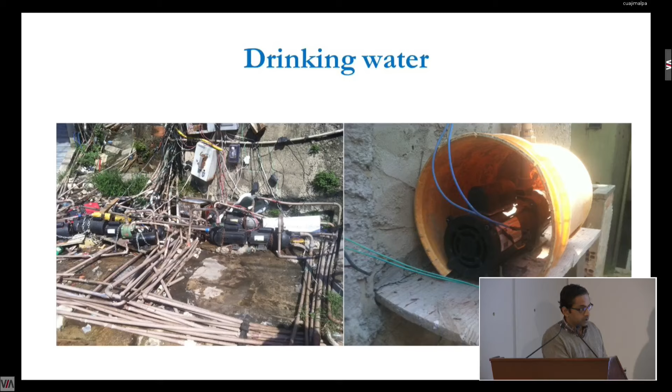On the other hand, from the same communities, you get drinking water all the way up top, but then essentially sewage comes directly out of these households. And you see this everywhere. This works very well because the drinking water and the wastewater are not connected, but the sewage comes right out. And again, this is a classical example of a linear model. Essentially, the model is as follows.

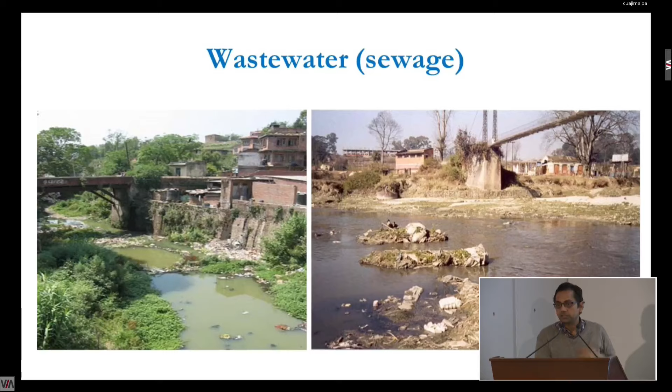We are mining water. In some parts of the world, we are blessed with tapping into surface water because everything is connected. Treatment is very good, so the surface water supplies are relatively clean, so you can still clean them, drink it, and then discharge, but that cycle is closed. But for most of the world, this is not possible. So somehow you get drinking water, but then out comes H2O plus X. So this is the linear model. It's not closed, it's not connected.

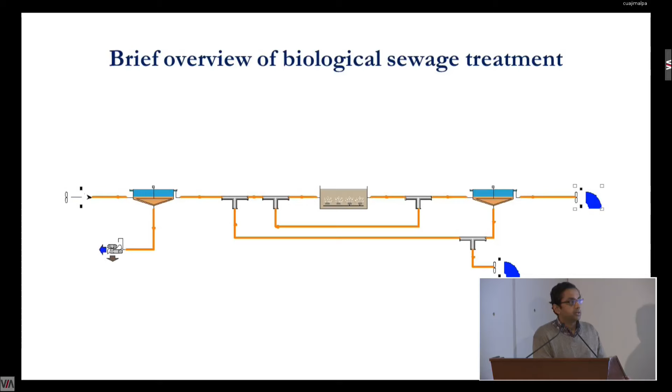What do we do now? So let's take a look at how things are done in some parts of the world. Let's start here because we have to start somewhere. When we talk about centralized biological wastewater treatment, sewage treatment, and again, this is very high level, essentially we take the high molecular weight, the high particle size stuff out, and most of this is done by gravity or mechanical means or adding chemicals and so on.

And then we get sludge, for lack of a better term, and it really makes little sense because this is really the richest feedstock, the richest substrate that can be biologically consumed. But what we actually feed to the biological reactors are soluble materials, some particulates, but more easily degradable materials.

So in wastewater, H2O plus X, the X can be considered mostly a mixture of organic carbon, nitrogen, and phosphorus, if you're talking about human waste. So we take all of that into these massive bioreactors, and we basically transform the organic carbon and, if needed based on regulations, the nitrogen and phosphorus. Now let's engage in some more discussion. It'll be good to understand what we are talking about in terms of carbon, nitrogen, phosphorus.

Okay, so let's start there, assuming that this is all human-derived waste: human-derived urine, human-derived fecal matter. Let's dig into this a little deeper. What is the oxidation state of organic carbon in human waste? This is good to understand because it impacts what we are actually doing with it, or what we should be doing with it. What is the average oxidation state of organic carbon in human waste?

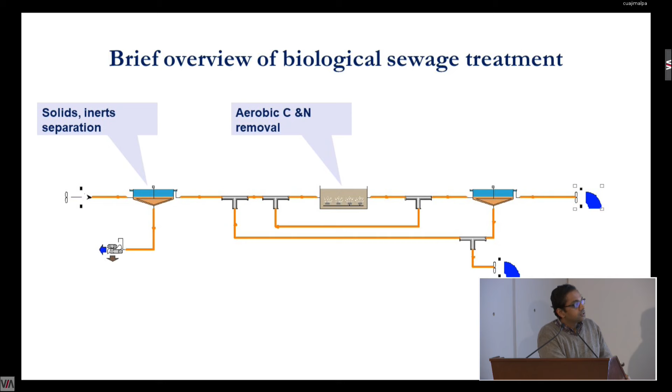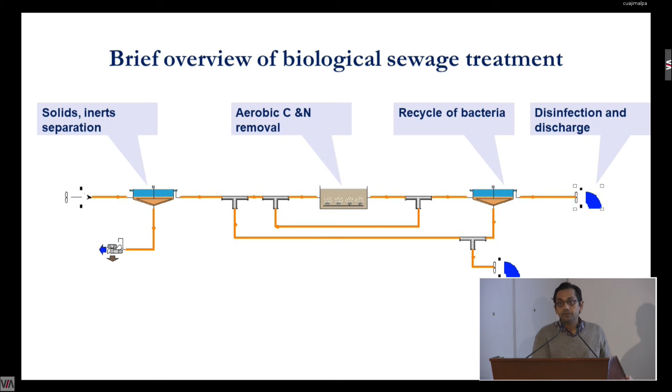Phosphorus we can precipitate out and do other stuff. So all of this has happened. Then we produce more bacteria here. We settle the bacteria, put it back into the reactors. Depending where we are in the world, we can disinfect it and discharge it. What have we obtained in return? We obtain clean water.

Now, all of this comes at a pretty significant cost. The energy that we have to provide to oxidize the carbon, to oxidize the nitrogen is quite substantial. We also need to invest a lot in terms of chemicals to drive some of these processes. And then in some cases, the organisms and the reactors that we're dealing with can also produce greenhouse gases, which could be quite substantial.

Okay, let's put some actual numbers. If we are talking about very good treatment processes, but which are inefficient in terms of energy and chemicals, we are talking 60 cents to $1 per pound of nitrogen removed. Even if we say 50 to 60 cents per pound of nitrogen removed, this is quite substantial.

In terms of chemicals, at least close to where I am right now, we spend about $20 to $40 million just purchasing organic chemicals to remove nitrogen from the wastewater in New York City, and that's quite substantial as well. And what have we obtained? We have obtained clean water.

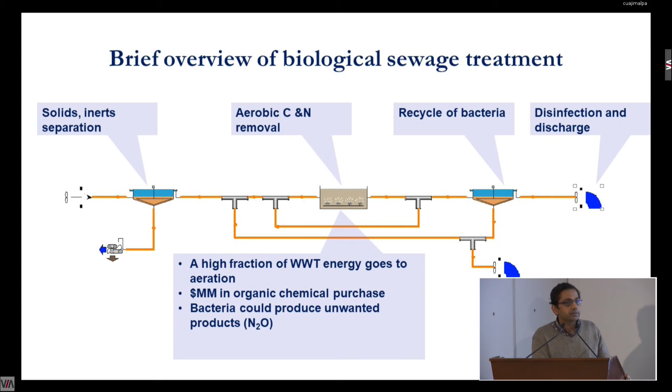Going back to the grand challenges, we have solved the challenge of water, but just the challenge of water. We have no accounting of how much we are spending. We don't pay much attention to how much we are spending in terms of energy, in terms of chemicals, and so on. And that's fine, it works, but what really goes wrong is when we take these models and put them in parts of the world where they are never meant to be. So let me show you another example.

So this plant is supposed to be fed with trucks that come in with fecal sludge from the greater Accra metropolis. Accra doesn't have pipes. They don't have pipes for drinking water. They don't have pipes to convey the fecal sludge into these plants. So the trucks come in, they empty the tanks, and they take them to plants like this. Accra, like many cities in the world, is also subject to variability in terms of traffic. The truck drivers are paid based on the number of trips, not delivered to the plant, but emptied out of the households. Okay?

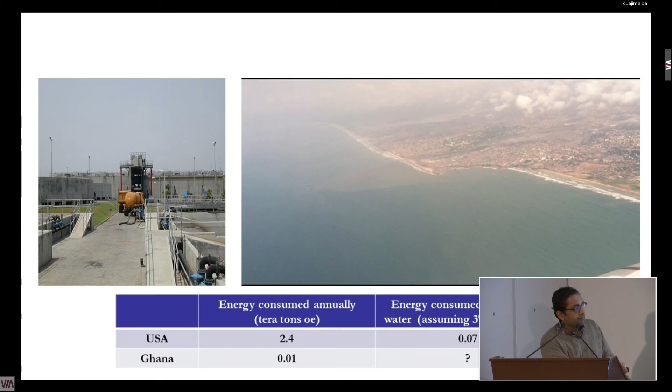So first I have the United States, and here I have the energy consumed annually in the US. And the value here is 2.4 teratons of oil equivalents. Okay, it's a large number. 330 million people, this is the amount of energy that's consumed. A fraction of that is devoted to the enterprise of clean water, drinking water, wastewater, pumping, treatment, everything. So it's 3 to 6%. Even if I take a low number of 3%, I have the number of 0.07 teratons of oil equivalents devoted to the enterprise of clean water.

Let's go to Ghana. This is where we are. Let's go to Ghana, and even if you normalize, the population there is about 30 million people. They don't even have the energy that we can expect them to take, especially all these technologies from other parts of the world, and expecting to put them here and run those technologies. They just don't have the energy.

And just to give you an example from a very personal standpoint, I grew up in Delhi in India. We did not have energy 24/7. I remember sitting writing exams when the temperature was close to zero, and what happens is your handwriting becomes smaller and smaller because it's cold, your hands are freezing. And then you get 40 degrees Celsius in the summer, and then there's no electricity.

We did not have access to clean water 24/7. We had access to water 3 hours a day. So we also had illegal pumps, and we boosted the water and stored massive amounts of water. But this is reality, and it's not just clean water and sanitation. This is reality for about 4 billion people on the planet.

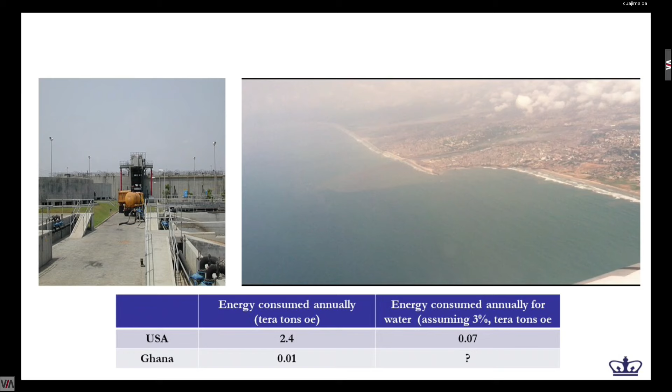And so now if you ask those people to take the little energy that they get and devote it to models like this, they are absolutely not going to do this, right? So we need better models. We need to totally change our thinking. And so the model that we have now, let me go back one slide. This model that we have now, we take H2O plus X, and we put in more energy, more chemicals, more resources, and what we get back is H2O to meet a certain set of permits or regulations, and we've devoted some resources here, and that's not possible.

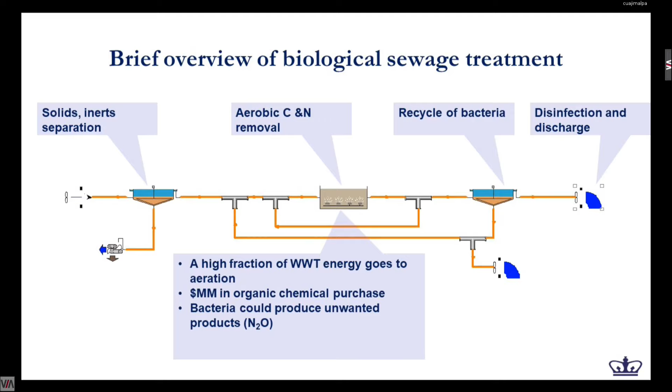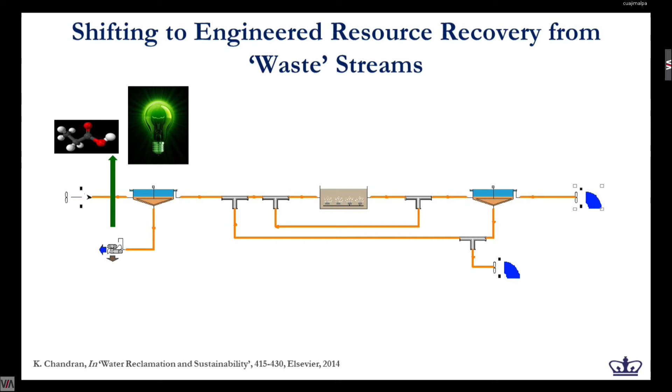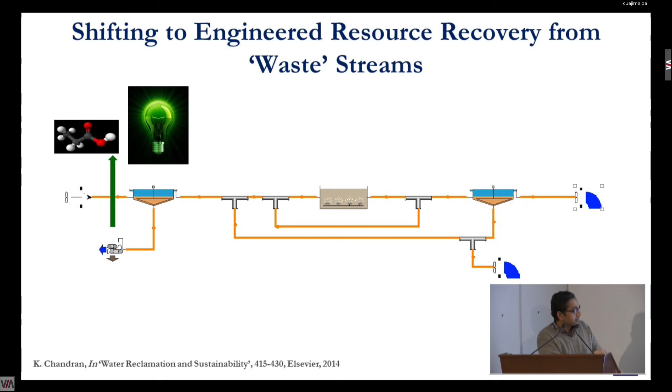So what do we do? Let's go back to the blueprint. Instead of putting in more, perhaps we can consider recovering the X, not removing the X, but recovering the X in the form of chemicals and energy. And chemicals, I think we really have to pay attention. It's not just energy. In some parts of the world, energy is not the appropriate endpoint. It's chemicals. It's other products. We can recover this here instead of dumping the sludge. We can do this, of course, in the bioreactors. These are the factories where we can recover a lot of this.

Let's look at the flow. And as I understand it, there are plants in Mexico City, single plants from which there is a huge flow of wastewater. And after treatment, we can recover some of that energy as well. We can recover chemicals and energy here. And the point here is, what am I missing here? I'm missing clean water, because if you do this properly, you can produce clean water not as the sole product, but as the byproduct of all of this.

So now we are not talking about wastewater treatment anymore. We are talking about biorefineries that take not just sewage, they take all sorts of other waste, agricultural waste, industrial waste, and so on. And so these are basically refining not just carbon, but nitrogen and phosphorus up to different endpoints, of which water is one of the many products, not the sole product.

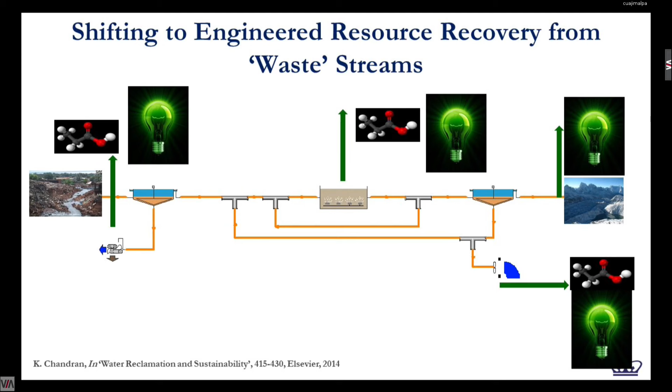And this is a model that can be perhaps adopted. And just to give an example also, in terms of what we are dealing with, just for the city of New York, we are treating close to 1.2 billion gallons of sewage per day. And what does the sewage contain? It contains about 2,000 tons of organic carbon per day that can be recovered, not removed, not converted to CO2.

It also contains about 300 tons of nitrogen in exactly the same oxidation state that we needed for plant growth. It also has about 60 tons of phosphorus. So instead of taking all of this and removing this, perhaps we can start to recover some of this. This 300 tons of nitrogen per day, if you multiply it by $0.5 per pound of nitrogen removed, you can try to figure out the cost.

And this is also why we need more efficient technologies that can use less energy, use less operating capital for operations as well. And then I would urge you perhaps to do the same kind of calculation for Mexico City or other cities to figure out what should be done, what can be done, and how it should be done.

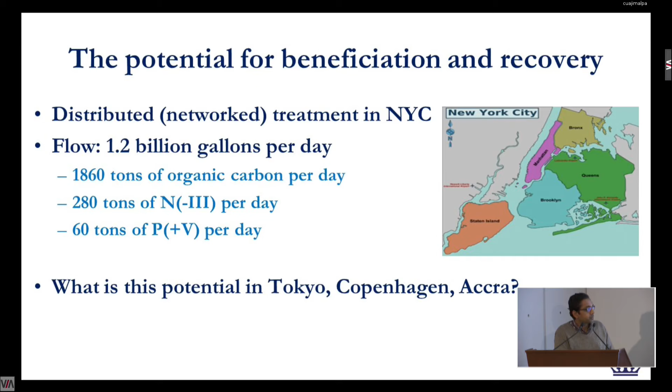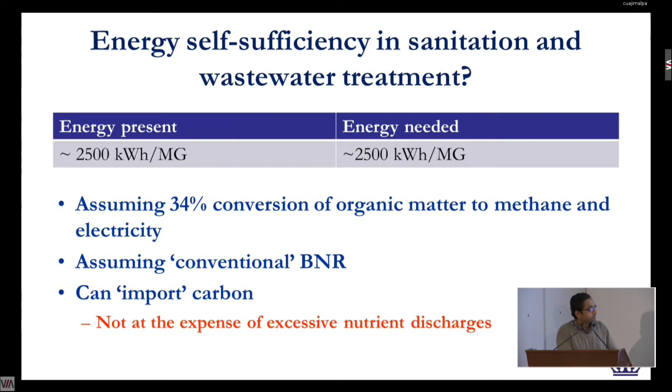If we now stop thinking about wastewater treatment, pollutant removal, if we now start to look at recovery of resources, including water, it doesn't have to be potable water, including water for different objectives, this now becomes more and more favorable. So let's take a few examples now, and that's what I'm going to spend perhaps the rest of the time today.

And so what can we do in terms of end products? We really have to stop thinking about biogas. We really have to start thinking about other endpoints beyond biogas just for the carbon. The nitrogen and phosphorus we can think as well. And I know many groups here are actually working on this. Professor Reva himself is working on this, going beyond biogas to far higher value chemicals.

Of course, we have to figure out the market. We have to figure out the economics. But we really have to stop just fixating on biogas. What can we do? We can look at high energy, next-gen biofuels. We can look at commercial chemicals. Nutrients, of course, can be recovered for fertilizer as well.

The other thing that I always stress is that we should really, again, stop getting carried away. Just because we can make biofuels, just because we can make high-value chemicals doesn't mean we should. We are not in this enterprise just to extract chemicals that have no end application. This resource recovery really needs to address a higher objective.

And in some of the work I have done, the objective is just providing sanitation. Okay, that's the higher objective, which is then supported by some of the resources that we are able to recover, and that I will discuss as the first example.

So the first example I want to give is the work again back in Ghana, where the objective was to convert the organic carbon present in human fecal sludge to lipids and to biodiesel. And the point was not to make biodiesel just to sell at a pump. No, the point was to run the treatment plant processing the fecal sludge on the biodiesel that we were recovering.

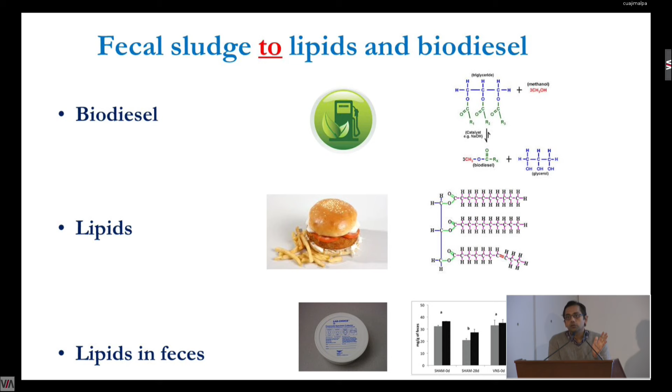Okay. So initially the objective of this project was not fecal sludge to lipids. It was basically fecal sludge to biodiesel. And they even came up with a nice acronym, and then we realized it's not the most efficient. I'll come back to lipids and fecal matter later on because I have this nice picture I can show you.

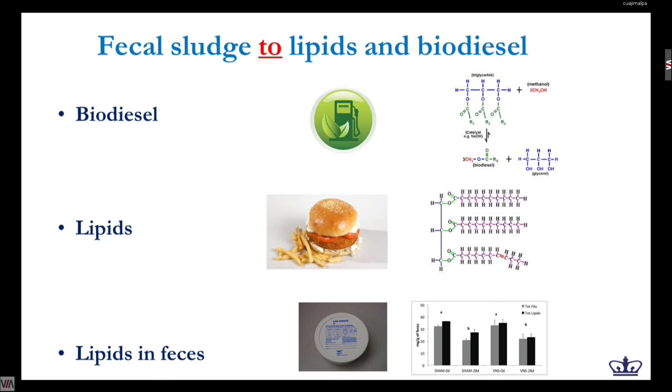But the point is, when we go do a lipid panel, I'm going back one slide, the lipids present in human fecal matter is very, very low. It's about 6 to 10% on a dry weight basis. So 6 to 10% of this is this lipid fraction. So if I want to do this, react with methanol and make biodiesel, I'm going to get a very, very small amount of biodiesel.

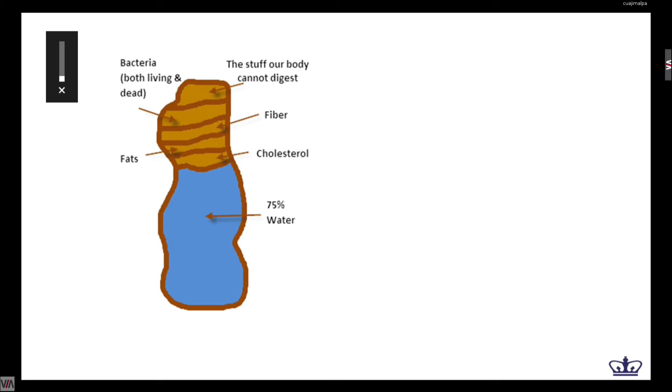Of course, we realized that this is the limitation. We didn't stop. What we then figured is, if we can take all of this and convert all of this to lipids, then we have a higher mass of lipids that we can actually work with. We can produce a lot more biodiesel, and perhaps this becomes more favorable. So our technology basically doesn't focus on the intrinsic lipid fraction. We basically take everything and convert it to lipids.

Then the question is, why do we stop there? We can take everything and convert it into carbohydrates. Take everything, convert it into other organic molecules, right? So now this is biorefining. It's not just scavenging the lipids and making biodiesel. This is now truly refining, taking a mixture and making basically anything that we want with it. This is more powerful, and that's what we did.

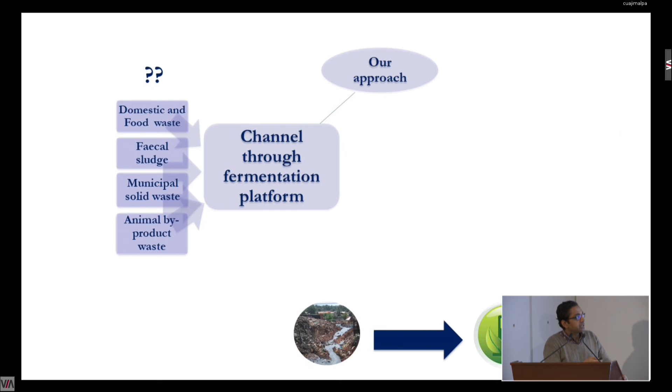Okay, so basically the platform technology that we have is, we take basically any waste, these are all enriched streams, we channel this through an anaerobic fermentation platform to make short chain volatile fatty acids, and then we use those volatile fatty acids to go anywhere. So we've done lipids, we've done some other compounds as well.

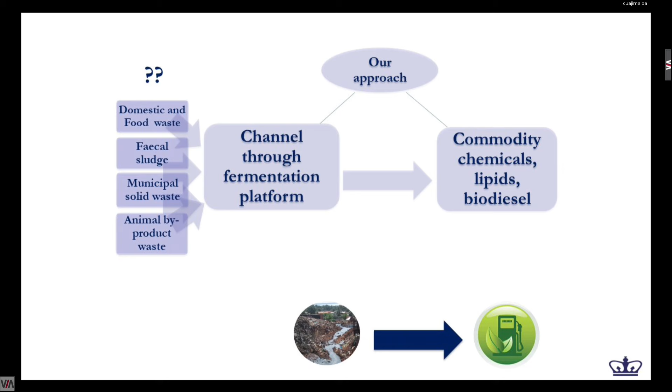And so the point is, the challenge I think today is to basically understand what we can make with the VFA. That's really how powerful this technique is. Once we make the VFA, we can, I think, go to many different endpoints. So let's now understand what we need to do in terms of producing the VFA. So for that, again, let's go back to this conventional model of anaerobic digestion.

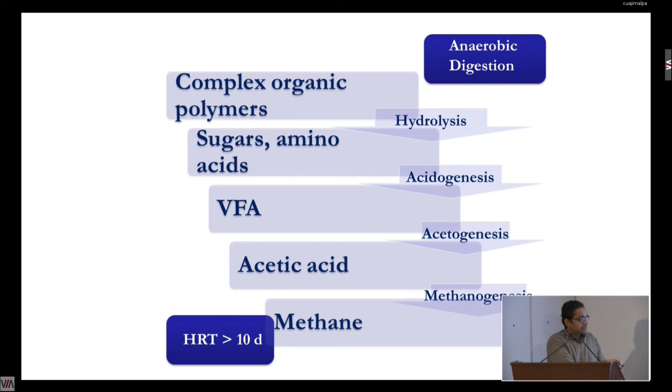So anaerobic digestion, as we treat it, is essentially a cascade of multiple processes. The first 3 steps are catalyzed by bacteria. The last step is catalyzed by archaea, and traditionally, for most engineered configurations, the last step is the rate limiting step. It's the slowest step.

So if you want to accommodate the slowest step, you have to provide a long retention time, right? And so the retention time typically employed even at mesophilic temperatures is close to 10 days. So essentially we need a long hydraulic residence time or a solids residence time, and this is what we need if we want to produce biogas.

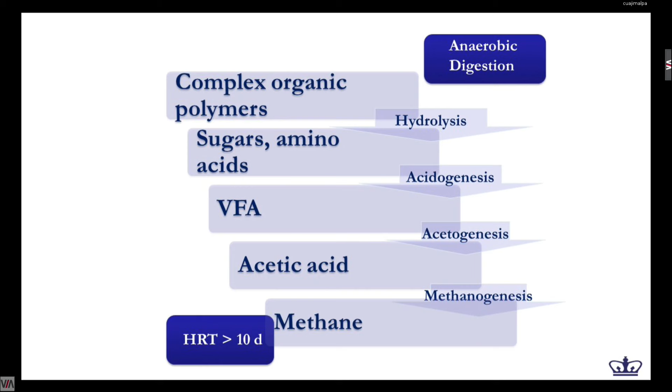Now there are also other endpoints that I'm going to focus on, and that's not biogas. They are the precursors to biogas, the short chain volatile fatty acids, for instance, acetic acid, propionic acid, butyric acid, and so on. So what do we need to change if we don't want biogas, but we want some of these intermediates? So that's when we talk about anaerobic fermentation, not digestion, but fermentation.

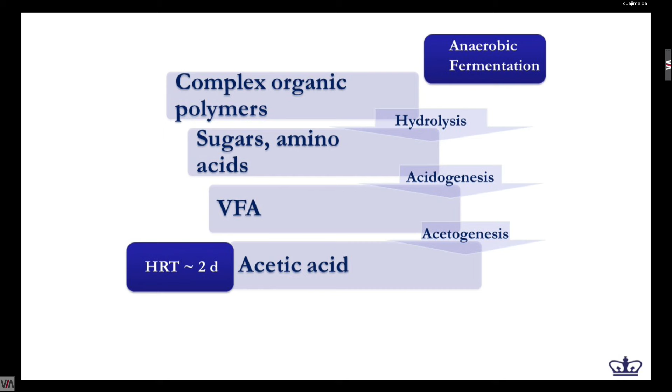And so basically, if you want to take out the last step, which is the slowest step, you can design a process with a much lower retention time, a smaller reactor. So by doing that and a few other controls, you take out the biogas. Now biogas, again, just to emphasize this, is not all methane. It's a fraction which is methane. It's got CO2, it's got other gases, it's got moisture as well. So it's not trivial to use biogas if you want to recover high value energy. But we know how to make biogas, and perhaps that's why we do it.

But there's a lot more potential if we don't go all the way to CH4. Let's say we don't allow it to go to CH4, we just basically take the acids, and we can do a lot with the acids. And the other advantage is we have smaller reactors, or for the same reactor volume, we have a higher throughput.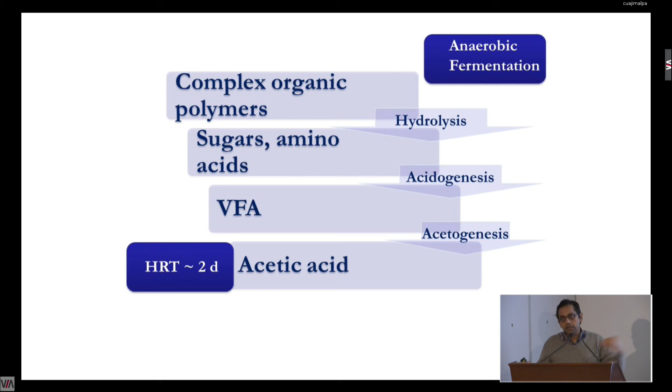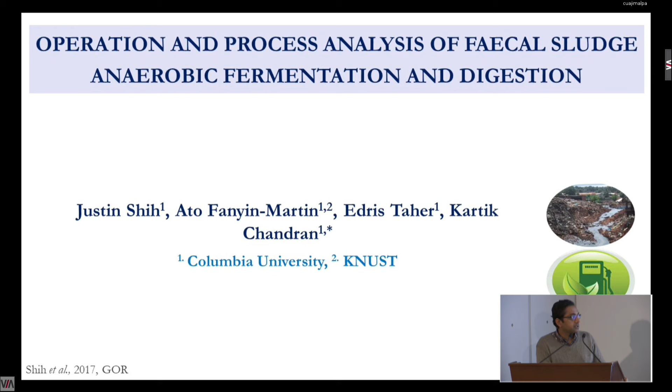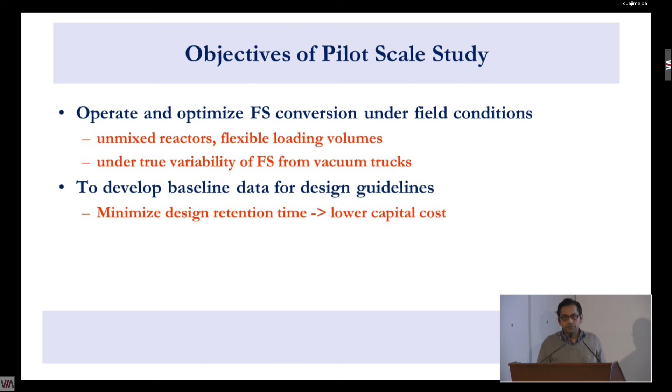Okay, so now let me take you to the results. So for this project, the focus is extracting the acids, making lipids, and then making biodiesel with the lipids. And this was done in the city of Kumasi. We were working with the Kwame Nkrumah University of Science and Technology, which is in Kumasi. So this is Ghana. This was our system. And so the objective was to basically convert the fecal sludge into biodiesel. I'll skip through this. And this is the system that I designed. So let me show you some pictures.

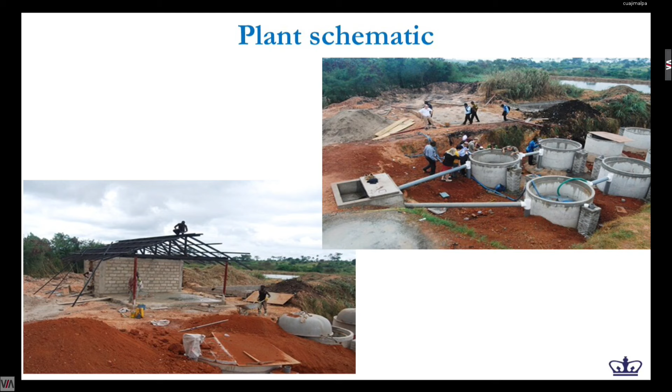So this is where we are. Here you can see, this is basically a dump site for fecal sludge. It's far away from the actual city. There's no water, there's no electricity, there's no Wi-Fi, there's nothing. But there's a very, very steady supply. Every 2 to 5 minutes there's a truck of fecal sludge coming in. That's guaranteed. There's nothing else, but there's a lot of fecal sludge. It's a dump site. And so here you have anaerobic lagoons. Here you have also mountains of fecal sludge. So we are surrounded by fecal sludge.

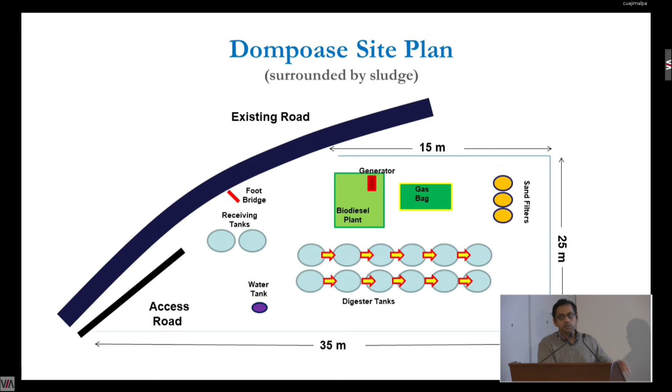And so we actually built this whole system from scratch. And so these are the tanks. Each tank is actually 10 cubic meters, and there are 12 of these tanks. Okay? So essentially we are taking fecal sludge that comes in, we have the receiving tanks, and we have a splitter box. And the hypothesis here was, I basically staged these reactors, and each tank is about 2-day HRT. So the fast reactions can happen here in the first upstream tanks, and the fast reactions are the ones producing the acids, and then the latter tanks can produce the biogas, the methane, right? So that was the hypothesis.

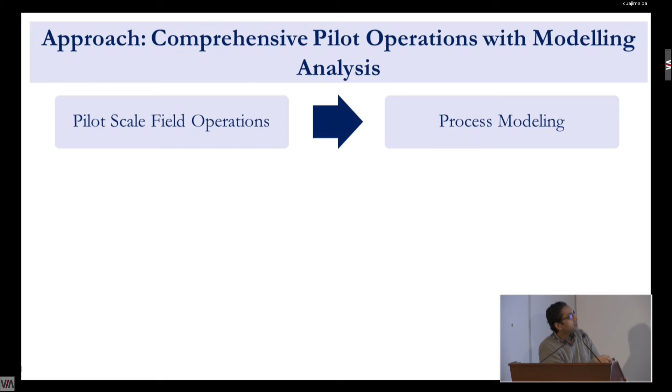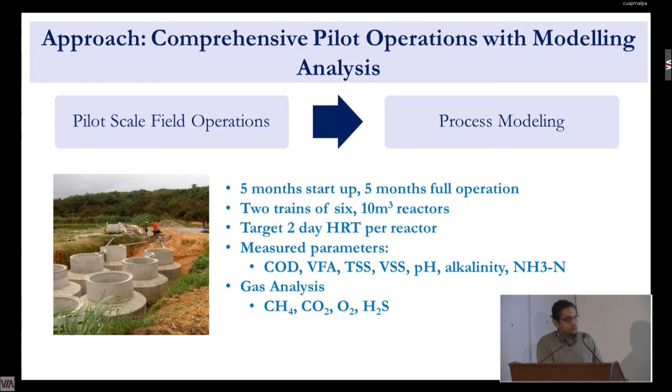Okay, so we had all of this, we ran the reactor, and this is our approach. We ran the reactor for close to 10 months or so. We took the data and we did some process modeling, model calibration, and then we have a model now that we can use, and these are the details and so on. And we did a lot of measurements from multiple reactors over time. We did a lot of measurements that are not typically done in the wastewater industry, not with fecal sludge. Nobody does this for fecal sludge. But the point is, we are not running a fecal sludge treatment unit. We are running something where we want to produce biodiesel. So we obviously have to start measuring a lot more.

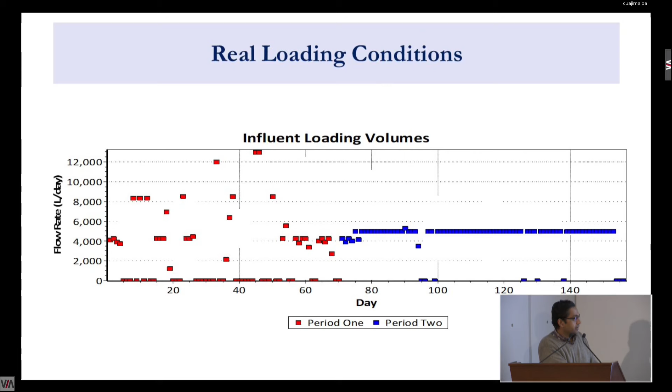After that we were able to balance this a lot better, and our process also started doing this. Just to give you an idea of what fecal sludge actually is, just in terms of the coarse parameters, this is the variability that we are looking at. Huge variability. We can't stop because we have variability. We have to just design our process that can handle the variability.

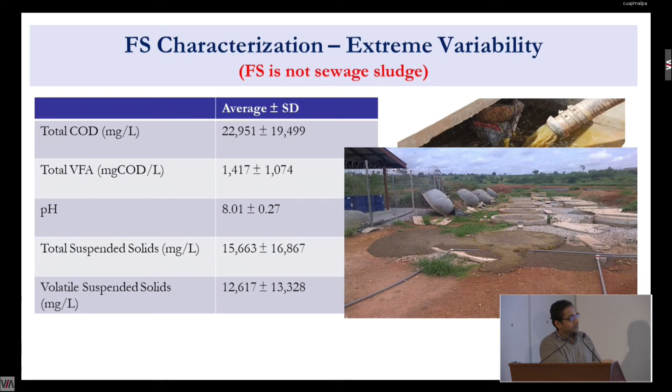That's the point. Okay. Sometimes what happens because of the variability, this is tank number 1, 2, 3, 4, 5, 6. There is so much production that the tank overflows. So this is a mixture of processed and unprocessed fecal sludge, but that's reality.

And so using all the numbers we had, we actually calibrated the process model. The process model is basically a set of equations that describe the multiple steps of carbon conversion. So there are probably thousands of parameters in this process model. And I'm just showing you a very tiny sample data set. So this is reactor 1, 2, 4, and 6.

And then here I'm showing you the dots, which are the experimentally measured values of the total VFA, off-gas flow rate, and then the red lines are the process modeling outputs. The calibration approach is basically to match up as well as possible the model and the experimental results.

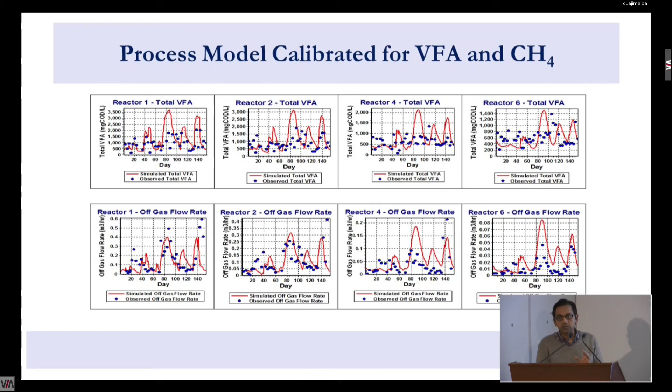And so if you want a perfect match, you can go and change all the parameters, put it into a data mining software, change all the parameters, and you'll get a perfect match. But this will be meaningless. A good calibration exercise, if you truly understand the process, changes as few parameter values as possible, and still gets a reasonable match. And so for our calibration effort, with all those thousands of parameters, we only changed 7 parameters, basically, and we were still able to get a good match.

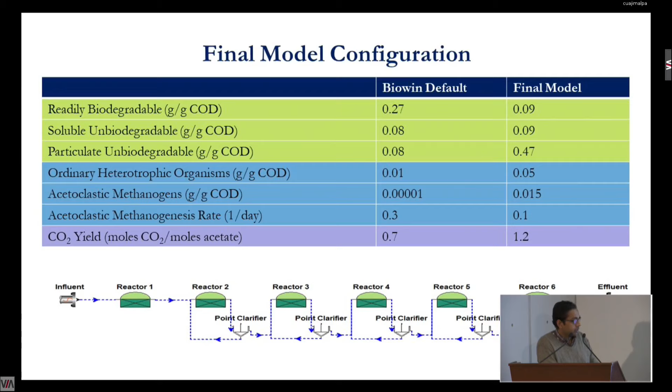And the point is, now we have this process model that allows us to describe the fate of fecal sludge through this cascade of reactors to produce both biogas and volatile fatty acids. And I'll tell you right now that the hypothesis that the upstream reactors will produce the acids and the downstream reactors will produce biogas was not valid, because fecal sludge is not inert.

It comes in already with bacteria, it comes in probably already with archaea, and they are active. It's already getting processed when it comes in. So even at a 2-day retention time, we get biogas production, because this is not dead material. It's actually active. And all of this had to be considered during our modeling approach.

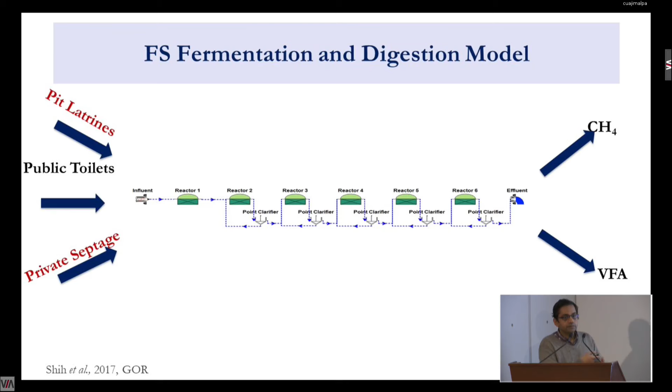But the point here is, this was the first model for fecal sludge conversion, not just to biogas, but in a very systematic fashion, conversion to VFA and methane. Now we can extend it if you're now talking about pit latrines and other processes, other interventions. Okay, so that was one of the results, and the project was quite remarkable, because we were told not to do any lab scale work.

We were told basically to go out to the field, and at a scale that was actually reasonable. So that system, the 120,000 liter system that I designed, was for close to 20,000 people. Okay, if you imagine building a plant for 20,000 people using the conventional centralized model, the plant would have been orders of magnitude larger in capacity. And that's because of that dilution factor.

And that's the point. Now, what are the outstanding research gaps? Of course, we have this. This is great, but we don't stop there. What else can we learn? What else do we need to do? I showed you the cascade of anaerobic carbon conversion.

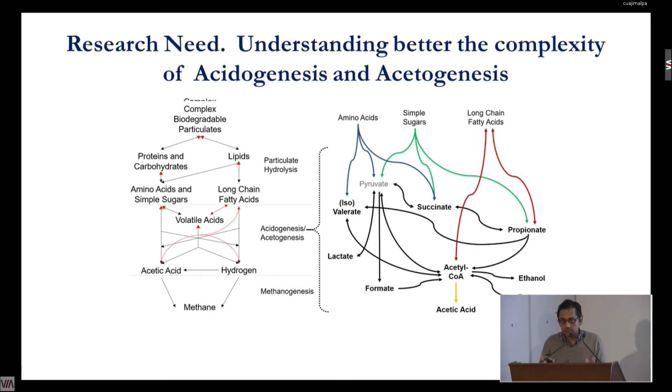But the point is, we don't even understand how to convert the organic carbon to volatile fatty acids completely. We have a pretty good understanding, but it's not complete. And so that's something that we are working on right now, because this is where we want to stop. We want to produce volatile fatty acids, but we want to do so in a controlled fashion. We want to be able to produce a defined amount of acetic acid, propionic acid, butyric acid.

We want to maximize the conversion. We want to maximize the yields. And we don't want to sit there and measure 20,000 different components in the feedstock. What we want to do is, if I am given the fraction of amino acids, the fraction of carbohydrates, the fraction of lipids in my incoming organic feedstock, I need to be able to predict what I can do in terms of my effluent VFA speciation and the yield. This is what I need to do.

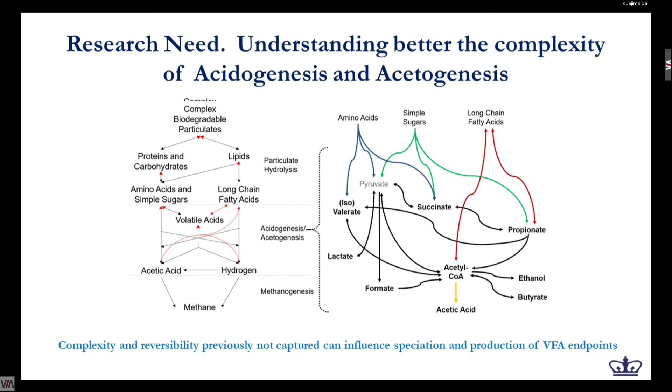So this is real bioprocess engineering, and this is the black box that we are now trying to open up. And so in this project, we went kind of in the reverse fashion. We went to the field and came back into the lab and ran some reactors. So we cannot use fecal sludge in some of the labs at Columbia, so we use food waste. And we fed reactors with food waste. These are continuous reactors again, long-term reactors, run over a year or so. And we did 6 reactors. So these are the 6 reactors.

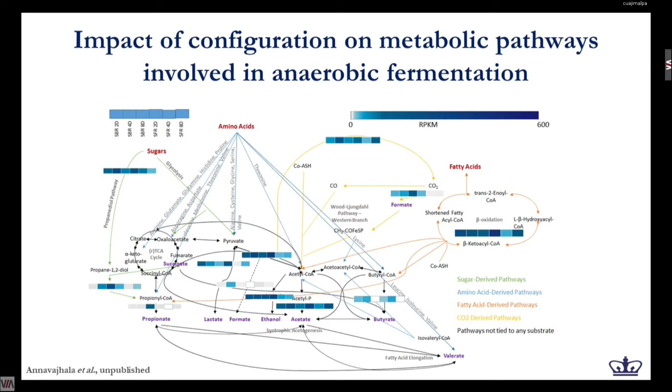We don't have to do this for every system we run. This would be impractical. But once we understand the system, then we can connect the arrows, feedstock to product. Ultimately, that's what we want to run. We don't want to run black boxes. We want to run real engineered reactors. Okay, so let's keep going. So we know how to make VFA. Let's say we make VFA. What do we do?

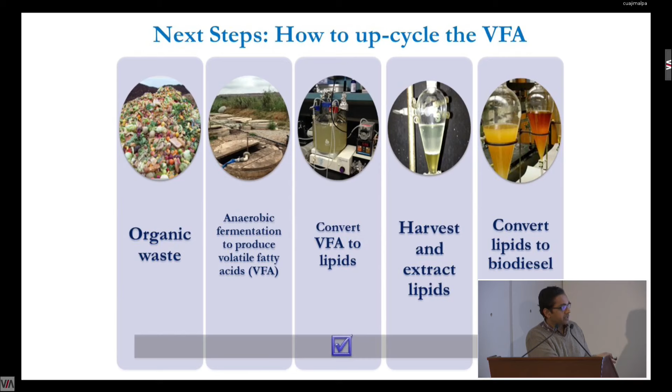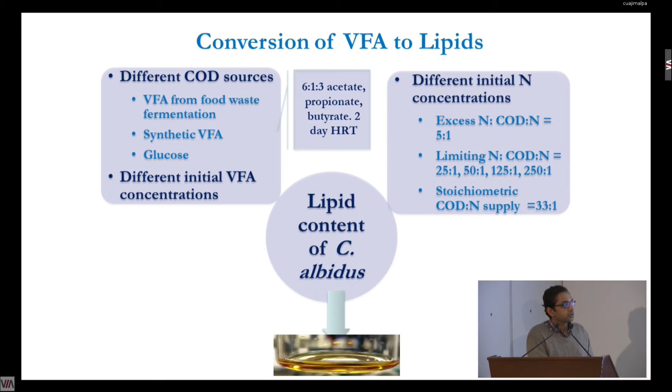After we concluded our project for biodiesel, we realized that maybe we should not be making biodiesel, maybe we should make lipids instead. So now I'm going to share with you very quickly how we make lipids. So basically we make VFA, and how do we go to lipids? We basically use a yeast platform to convert the VFA into lipids. There are some advantages to doing this. I won't focus on that now. Maybe I can do that during Q&A. I'm going to run through this, skip this. But essentially, it's good to produce a lot of lipids. It's good to produce the lipids quite quickly.

So kinetics and yields have to be high. But we also have to make the right lipids. So what I'm showing you here is the lipid profile expressed as a percentage of overall lipids for many different sets of conditions in terms of carbon to nitrogen ratio, in terms of different feedstocks.

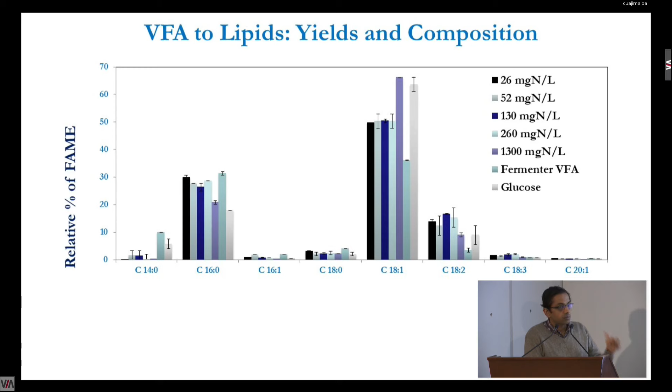So this Cryptococcus albidus, the yeast platform, if you take a step back, forget about the numbers, take a step back, look at the profile. The profile is remarkably consistent across different conditions, across different feedstocks. So this platform is basically coming up with a consistent lipid profile. Now we of course have to identify what this lipid profile actually means. This lipid profile essentially corresponds to that of palm oil and soybean oil.

So for our system, what we are actually doing is producing palm oil and soybean oil not by growing palm trees and cutting the palm trees, not by growing soy and harvesting the soy. We are producing palm oil and soybean oil from food waste. So that's the other connection. We are disrupting the linear model: growing palm trees, cutting the palm trees, getting oil, and that's it. Done. We are mining palm oil.

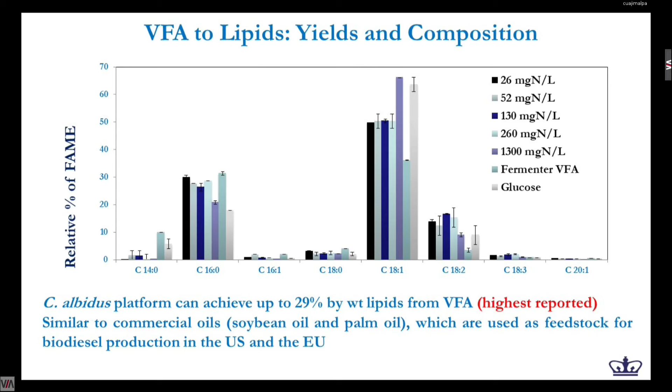Same thing with soybean. Same thing with the model that we grow food crops and produce biofuels. Here we are taking food waste and making certain end products, and that linear model is again getting disrupted. And so this is something that we are quite happy with as well. Again, proceeding more in terms of discovery and research and so on. We are not stopping when we make soybean oil or something. We keep going, right? And so what were the outstanding research gaps?

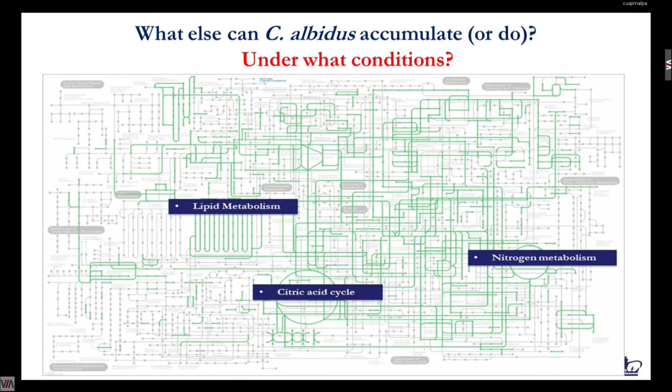We realized that the Cryptococcus albidus genome was missing. Why do we need to do this? Again, we don't want to take this as a black box and basically work with it. We want to open up these systems and then engineer them better. And so we sequenced the genome of this organism a couple of years ago, and we now have this genome.

We know that this organism accumulates lipids. It can probably accumulate carbohydrates, proteins. It probably can make other stuff as well. But for that, we need to understand what the potential is, and that's what the genome gives us. So we don't sequence genomes just because we can. We want to take this information and engineer better processes.

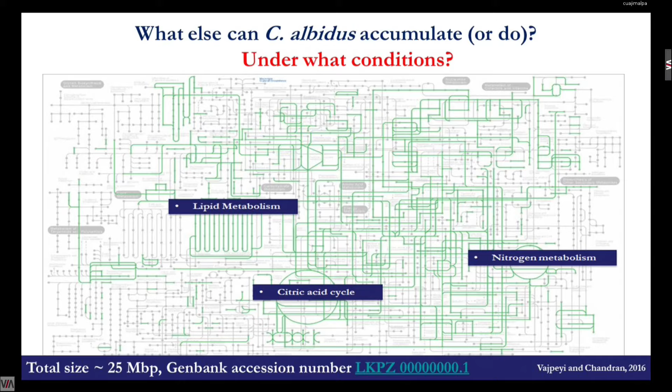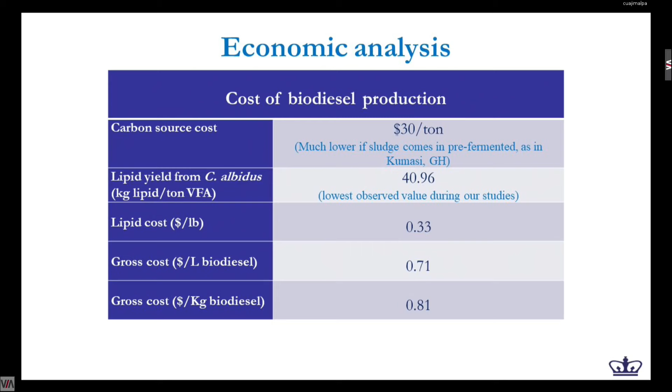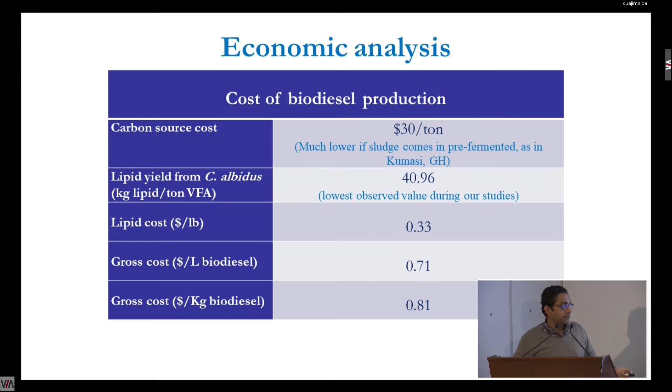But the point again is we are not making biodiesel to sell at a pump. The point is we are taking that biodiesel and running a sanitation facility. We are treating fecal sludge with it. So we are going from a dump site where there is no fecal sludge treatment, so 0, to treatment. So it's going from 0 to 1. So the cost, I would say, is somewhat immaterial because we are addressing a higher objective.

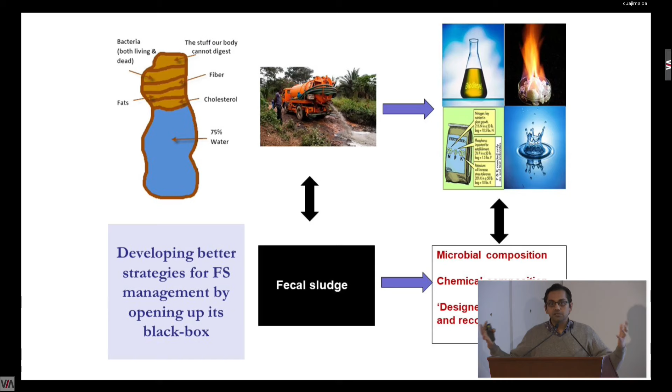Okay, what else do we need to do? We need to understand what fecal sludge is. We have to stop thinking about this as 75% water and X. So this is something that we are working on now. We are working on a project really taking samples all around the globe. What is fecal sludge globally? So again, we are looking at the chemical composition.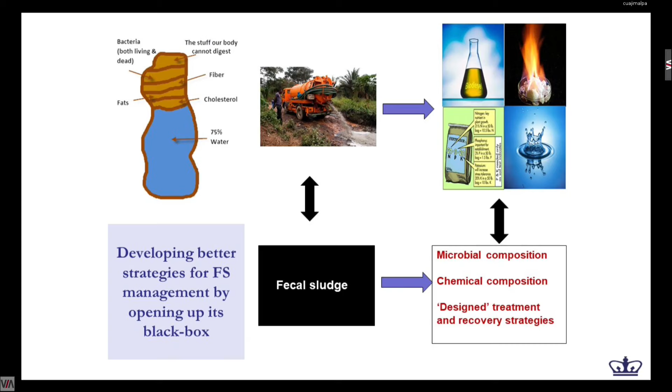We are doing some sequencing work on it; it's called the Global Fecal Sludge Microbiome Project. We are trying to understand the microbial composition, the structure, the function, new pathogens, antimicrobial resistance signatures. All of this we are looking at in fecal sludge samples from all around the world. Treatment is just one of the objectives. What else is there? Can we infer human health from the fecal sludge samples? So that's what we're doing here.

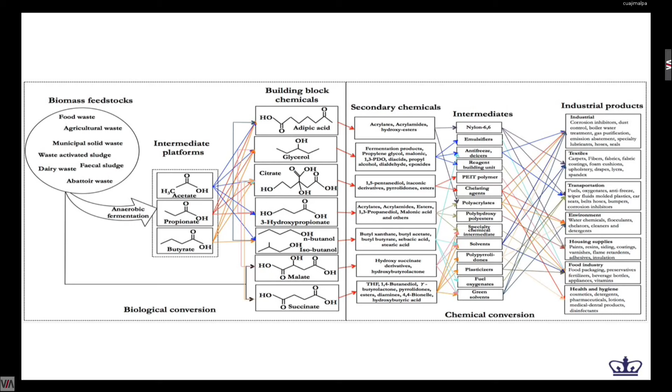Okay, this is just a slide that shows what we can do with VFA. So these are all the different streams. Anaerobic fermentation produces VFA, and the point is we can go just about anywhere with the VFA. I just showed you one example. And this is a review article that a postdoc from UAM, Luis Arellano, is working on now. So I thought I'd share that.

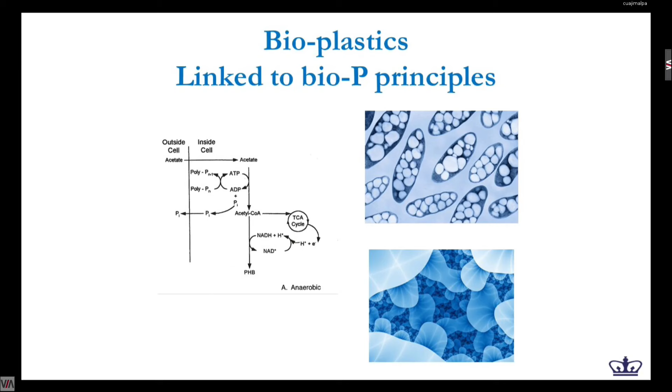We can do many, many different things with VFA. We can use the VFA for treating wastewater. This is one of my first projects in New York City, 2002. We can make bioplastics. We have done this. Other people have done this very well. I'm not really sure this is very, very favorable right now.

This is the technology actually that we are quite excited about. This actually can be implemented. So we don't stop at VFA. Even if we make dilute biogas mixtures, we use a different process where we use ammonia oxidizing bacteria to convert selectively the methane in biogas to methanol, and the ammonia oxidizing bacteria also oxidize ammonia to nitrite, and when coupled we can basically have a very efficient denitrification process.

So going back to the example I mentioned, in New York City we spend about $20 to $40 million purchasing methanol, glycerol or other carbon compounds, and then we also take the biogas and flare the biogas. So again, we make biogas, dissipate it, and then we bring organic carbon compounds to treat the wastewater. With this technology, we take the biogas and make chemicals, and we are able to reduce or eliminate the organic carbon that we need to bring into the boundary, and we achieve nitrogen removal. So this is again closing the loop, making this a bit more circular.

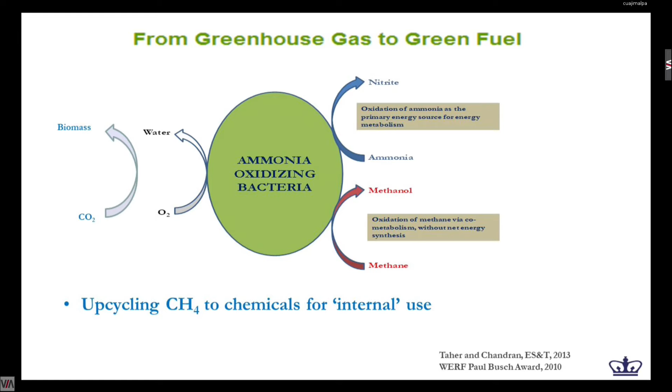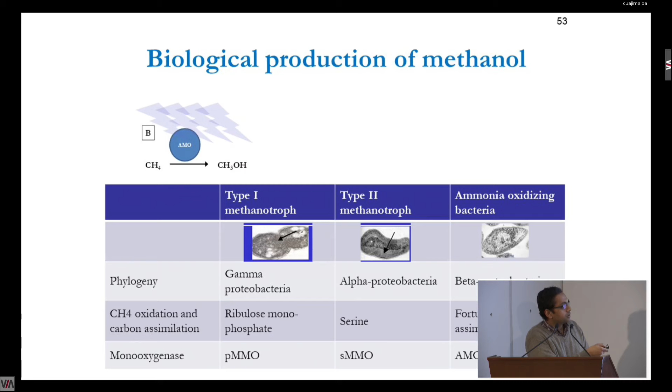Okay, I think I will run out of time, so sorry to skip. Basically the point of all of this is methanol is everywhere. We should probably start taking a deeper look at methanol and not just at some of the other alcohols. And these are some fundamental details in terms of how we produce methanol using ammonia oxidizing bacteria. Sorry, I'm jumping ahead. I can come back to it in Q&A. I just want to allow some time for questions. Okay.

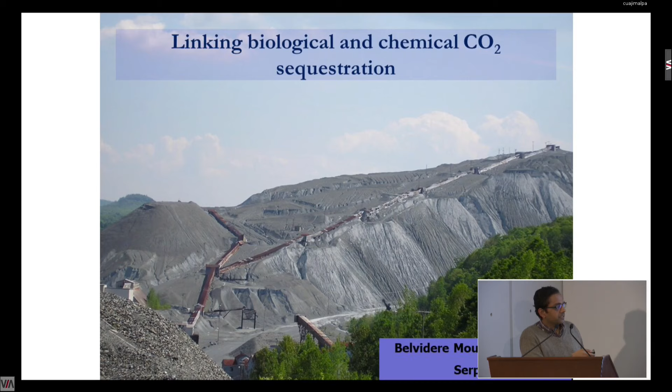Now I'll give you maybe one or two examples of things we should not do when we look at resource recovery. We had this very exciting project funded by the Department of Energy, and this was based on CO2 capture from the atmosphere and underground storage. And so my colleague was working, maybe I pressed something I should not have. My colleague was working on using serpentine for capturing CO2.

So I don't have control on this. Yeah, that's fine. So I think the window is right there. Yeah. Okay, great.

Okay, thank you. So here the project was to basically use serpentine to mineralize the serpentine and then use the cations to pull in the CO2. And the point was, how do you mineralize the serpentine? So this was the process technology. You take rock and you add some weak organic acids and you mineralize the rock. And then once the cations are released, you can adjust the pH and pull in the CO2, and this is to sequester the CO2. So this is geological CO2 sequestration.

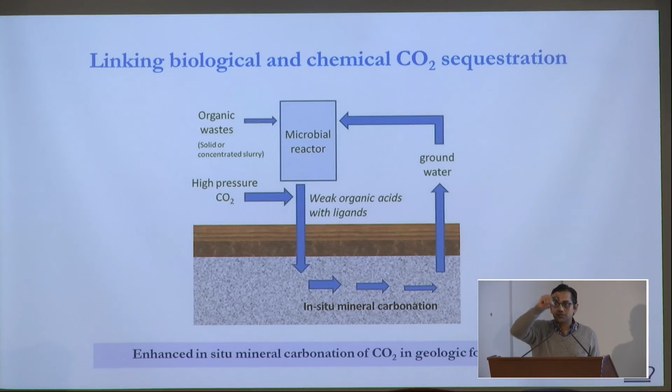The concept is great, and my tiny little contribution was to produce the weak organic acid, so take organic waste, ferment it to VFA, and use the VFA to mineralize the rock. This is a great project. It's a very nice application, but it's not very practical. But the point here is, at that time it sounded like a very nice connection to make. And one of the things I'd like to also suggest is, I think we do a good job at learning the fundamentals, but if we truly want to have impact and do some nice cool things, it's always good to look to connect to other disciplines, other topics, other end applications, and I think that could lead to very nice, interesting stories.

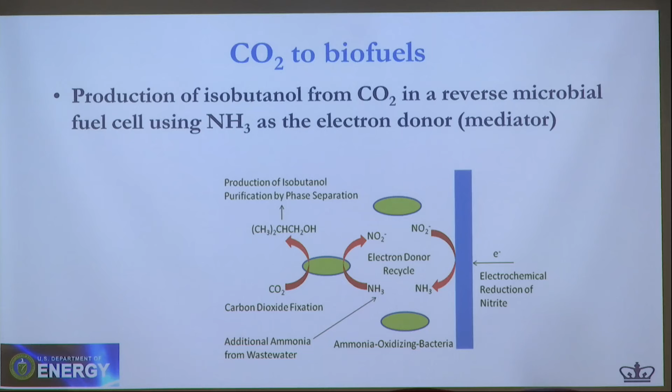This is another project again from the Energy Department, and here we basically have a process using ammonia oxidizing bacteria that oxidize ammonia to nitrite, and these are autotrophic organisms, so they fix CO2 and make more biomass. But our application was for these organisms to take CO2 and make isobutanol. Why isobutanol? Because it's a very, very high energy product and commercially quite favorable. So we basically took a pathway for taking some biomass precursors within the cell and making isobutanol.

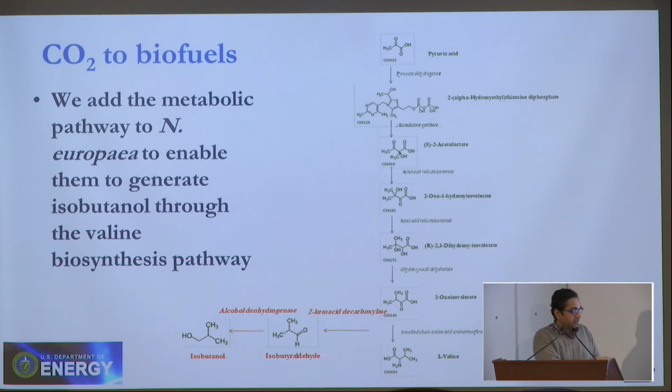Again, very interesting. From a very fundamental perspective, this is the first time this was ever done in this organism. But there are some limitations here. The precursor for isobutanol, isobutyraldehyde, is toxic, so the organisms don't like it. These are autotrophic organisms.

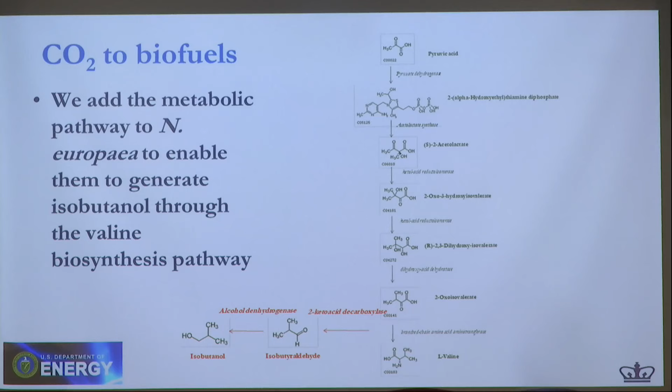They grow very slow. The yield is very low. So if you put a heavy plasmid with these pathways, they just don't like it. So it's a very novel application, but practically not very useful. So again, this is part of the journey. But I have one more slide after this, by the way.

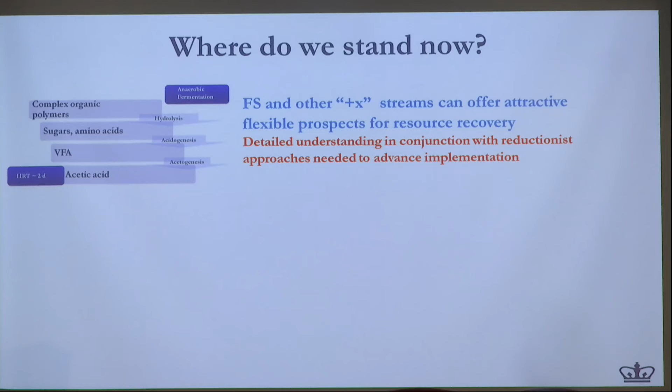So where are we right now? Essentially, if we want to truly harness the potential and make a lot of these systems circular as opposed to linear, the model for water, energy, food, and so on, we really have to start addressing these as systems and not individually. And once we start to do that, we are able to consider the X not as something that we have to remove, but as something that we should recover and can recover.

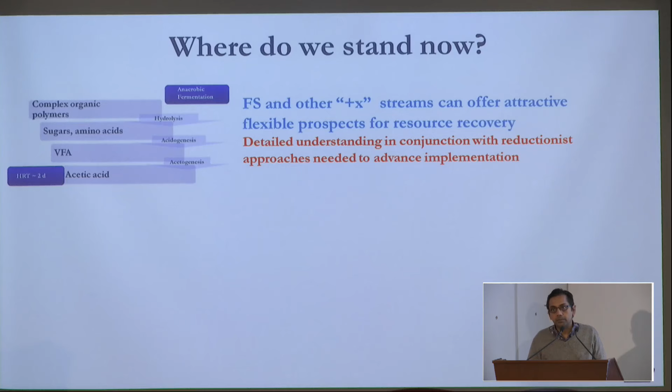So again, technology is not the limiting factor here. We need to be able to figure out what to make, what to recover. For example, if I'm sitting in the middle of Africa, do I need to produce isobutanol? Absolutely not. Perhaps I should do something that actually helps with a challenge that is locally more relevant, and scale also comes into this in a big way.

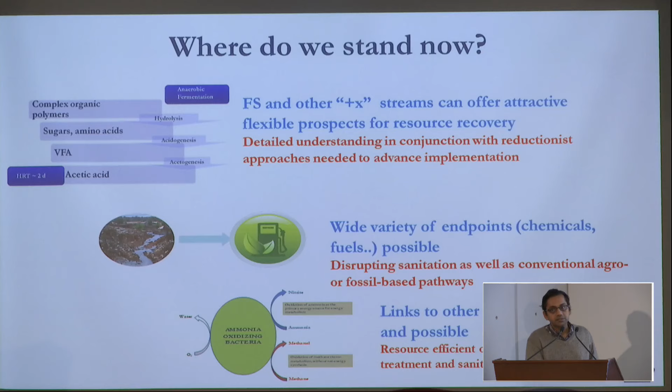The point is, we can make just about anything. We need to understand what to do and how to do it. And so for this, we need to understand links to higher objectives, not just from a technology perspective, but to some of those grand challenges that we have. Finally, I'm going to provide you with an entirely qualitative, probably very subjective framework, but perhaps we can indulge in this discussion for the next 5 minutes.